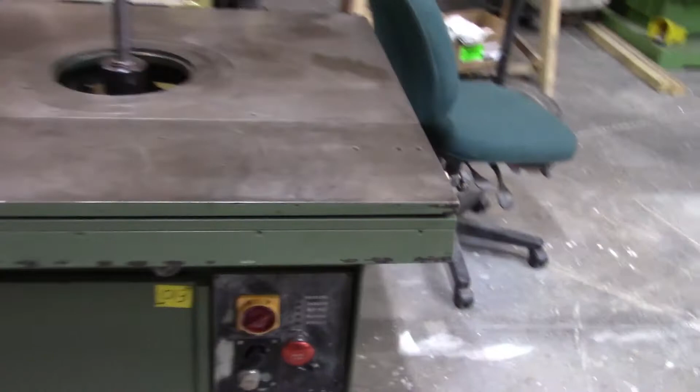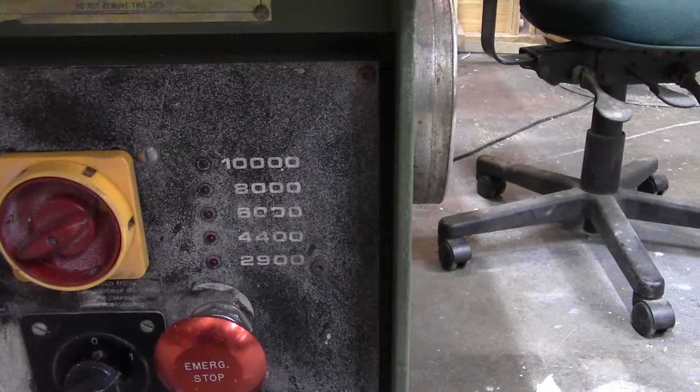It's an F-115. You can see down here the speeds you can acquire on it. You've got the low speed 2900, goes to 4400, 6,000, 8,000, and then 10,000 RPM. So it gives us a little bit more versatility.

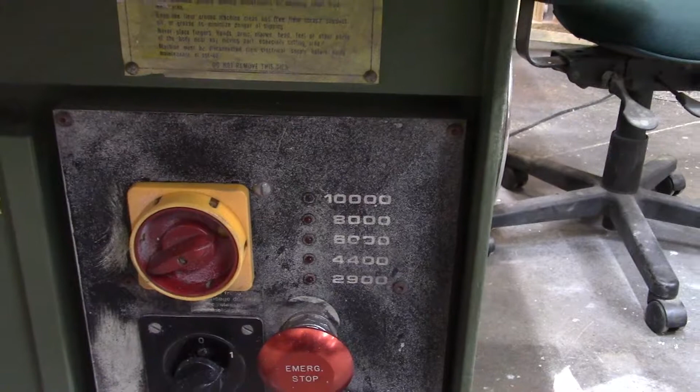The old Whitney was just a single speed, flat belt driven, so anyway this will be a little bit more advantageous to us. It also has this table here.

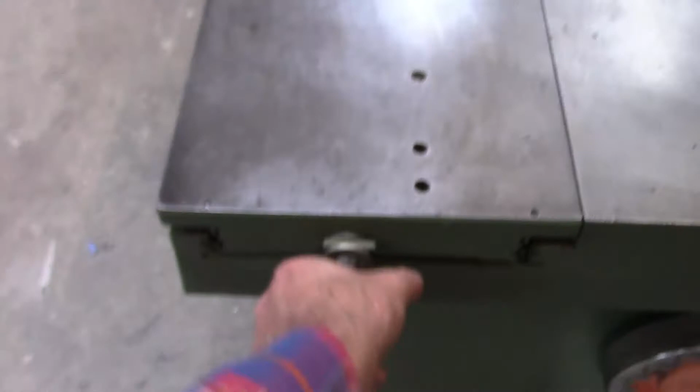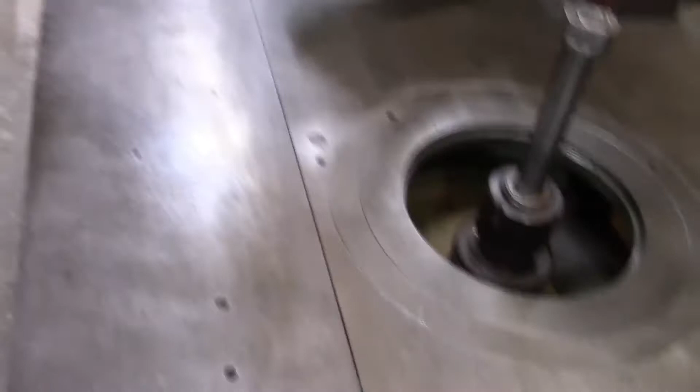This is a sliding table, so that gives us a little bit more when we're cutting the rails on the doors. We can put a T-fence on this and push them right through that shaper blade. It used to be that we'd have to do those end cuts by hand, and that's got to be a little bit dangerous, so this will ease up that problem.

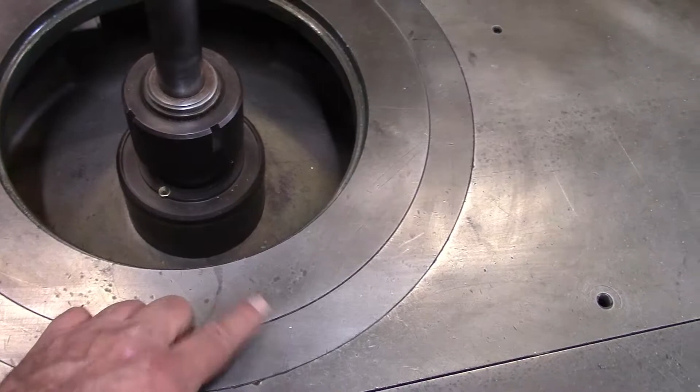So here's the rings. Each one of these is a size ring for a different set of cutters on this unit. The ring I showed you earlier comes in about so far, but it's still about a 7-inch hole, and we need to bring that hole into about 4.25. So we're going to make another one of these flanges with those details so it sets in there, and it'll be a little bit safer.

Now this is our other purchase we made. We got this for $100. It's a pin router. They're kind of being phased out of the industry because now everything's CNC.

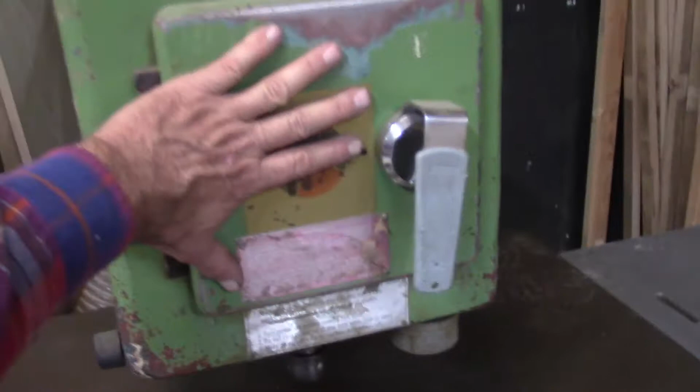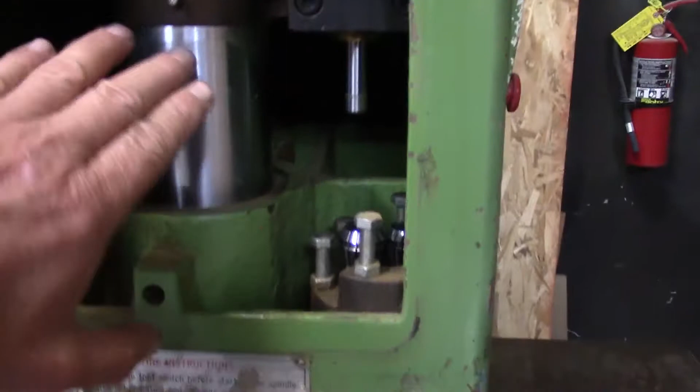But the way this works is your router is this upper head here. You can tell from my hand that that's a big drive there. It has a big old spindle in there that runs it. That spindle rises and lowers to take your bit down into the material.

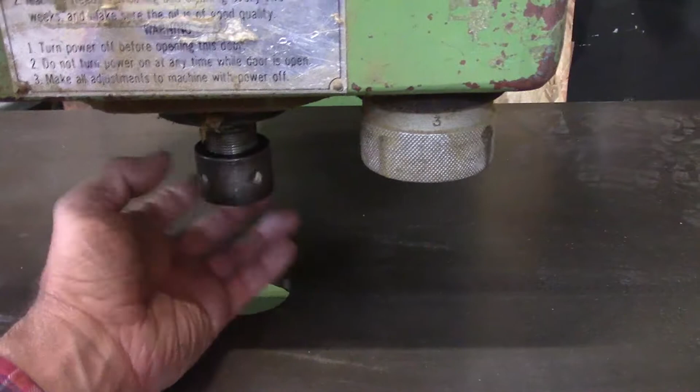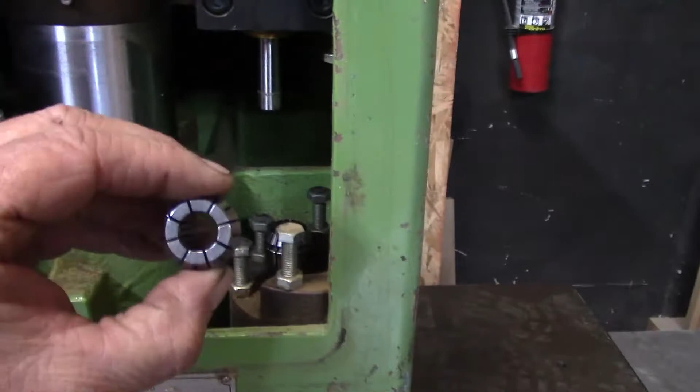This is where your bit goes up into. You can put whatever collet size you have for whatever bit size, typically either 1/4 inch or 1/2 inch. So we've got a 1/4 inch collet and a 1/2 inch collet. So that's all we really need for this machine.

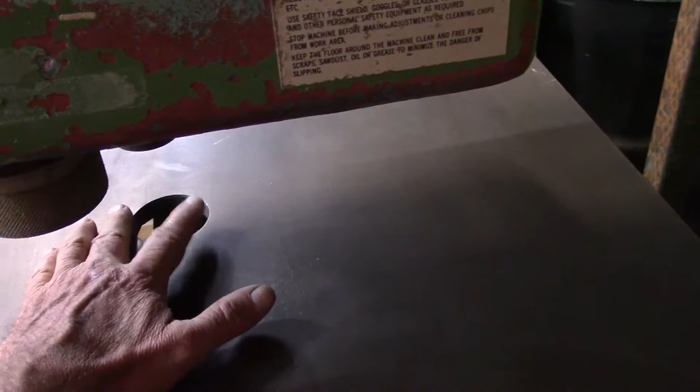So this pin, by stepping on a pedal, raises this pin. This bed lowers or raises depending upon the thickness of your material, and the spindle comes down and up, so you can measure the cut that you're going to make in its depth. And this pin comes up because... CNC is on a computer unit.

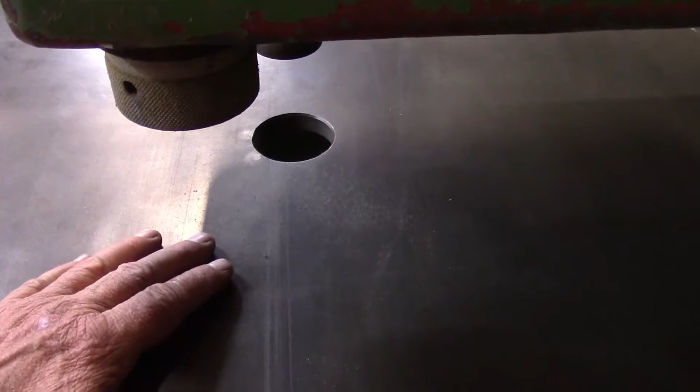Well, in the old days, which weren't too long ago, you'd use a pin router and you'd make a jig, and the jig would be so thick and it'd have the cutout that you wanted to make with your pin router. So you'd set your material onto that jig, the pin would come up, and wherever that cut was on your jig, that router bit would cut that material at that location. So you could do a cutout, you could make smiley faces, you could make just about anything you wanted with the right jig.

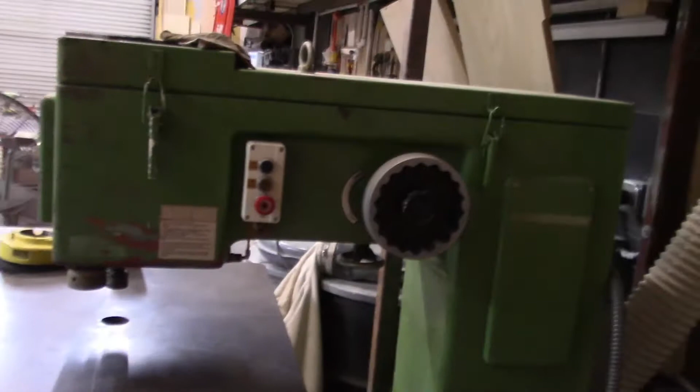These are used quite extensively in the making of musical instruments like guitars and items like that. They found them very useful. They make patterns, and they're able to use that pattern to make the shape of their guitars.

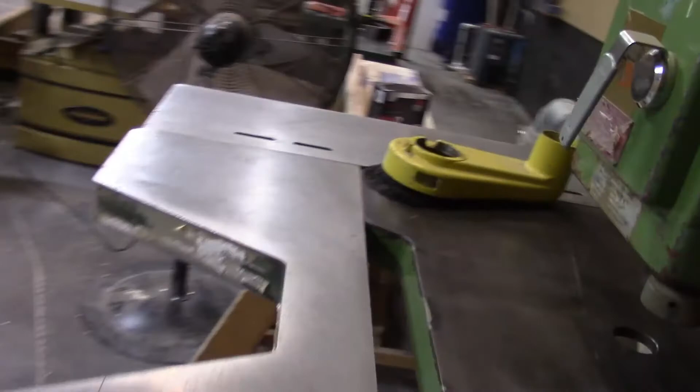So what I really liked about this is the big bed. We got this really nice big bed here. Now, to buy a machine that would cut out light kits in a door would cost me $15,000 to $30,000. Like I said, I got this for $100 plus some other fees. I think I'm totally into it right now at about $250.

So this has this nice big table on it, and I can set up an adjustable jig so that we could do all our light and louver cutouts in our doors, and that'll save us some time. Right now we lay them out by hand and cut them with a router from the top, and with a jig that we make for each occasion. So this will help alleviate that. So those are the two new tools we got.

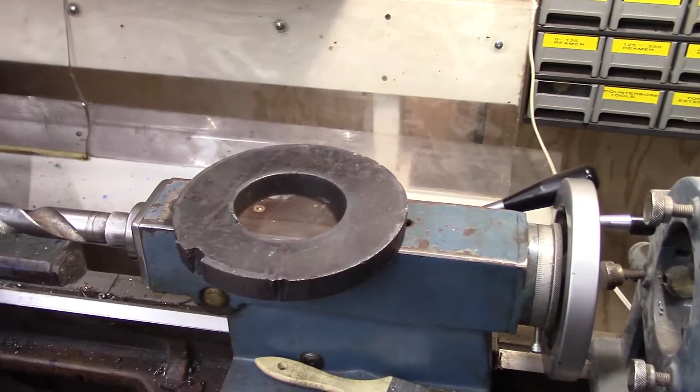Okay, we're over at the lathe now, and I wanted to give you a perspective. This is what we cut the part out of that we needed. We put this on the bandsaw and made a cut.

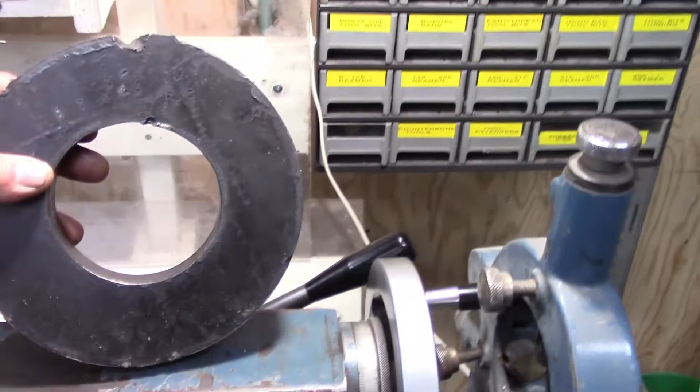I got this piece of scrap material down at our steel supplier. It was in their boneyard, and it had a lot of scale, and it had been cut with a torch. You could see that on the end. So it was in some places very hard, had a lot of scale on it, so we had to do a slow cut with this.

And this is what it turned into. You can see a real nice, beautiful, shiny cut. There's still a little bit of scarring here, but that'll be cut out when we do our recess. So we've already got started with that. A very pretty finish on it. It is looking nice. I did that last night.

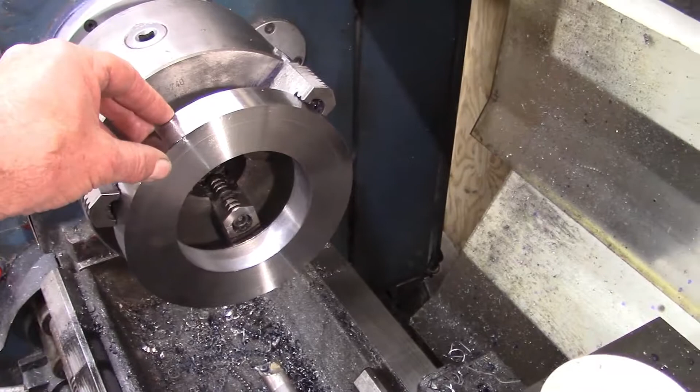I still have 1/8 of an inch to go on this hole to get it sized, and then we have to do the other elements on that part.

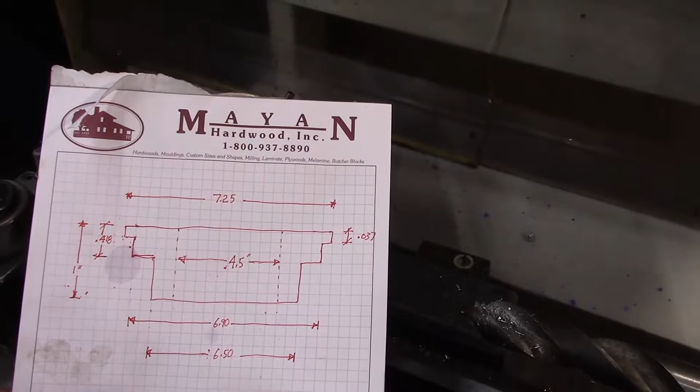So this is the drawing that I made for myself. It's an exaggerated drawing, but it helps me to see the details. So the top detail for the thin part of the flange is 7 1/4. We didn't get that. We're going to be down to just under 7 inches. So we'll probably pick up on the second flange level. Let's take you over there and I'll show you what I mean.

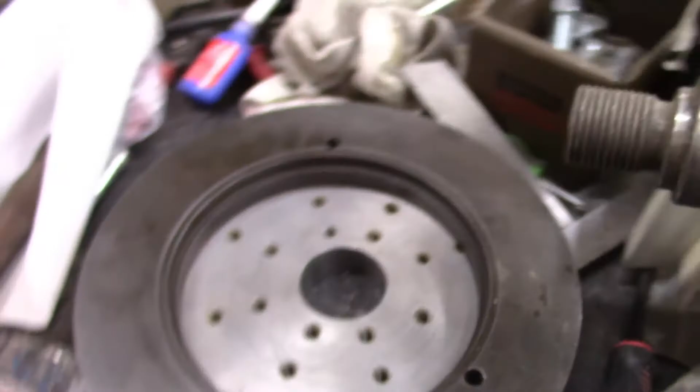This is the part that it's going to fit into, and you see that little groove there. That's 7 1/4 from side to side, and that's only minimal in its depth. I have it written down somewhere, but what we're shooting for is just to set into this inset here. We're not going to try to, because our part is too small to fit in there - had to trim too much off of it. So we're going to fit it down on this ledge and on down, and it'll be flush with the top of this. So that's what we're kind of doing.

So now I'll take you back over to the drawing and we'll discuss that for a second. So the width of this was 7 1/4, and of course all I've got is about 6 and a little bit over 7/8. So the first cut would have been 0.037. That would have been the first little ledge that we're making. But we're going to actually just go right down to this ledge. So we have to have that - that's going to be 0.418 to that depth, and the overall width of it is going to be 6.90. So we barely have enough material for that.

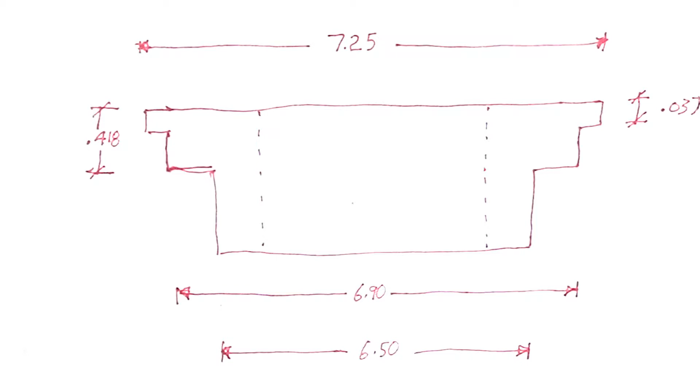So this is the bottom part. It has to be 6.50 to slip through there, and I have this drawn at 4.5. I went back and remeasured my knives, and they're just barely 4 inches, so we're going to go 4.25 for clearance instead of 4.5.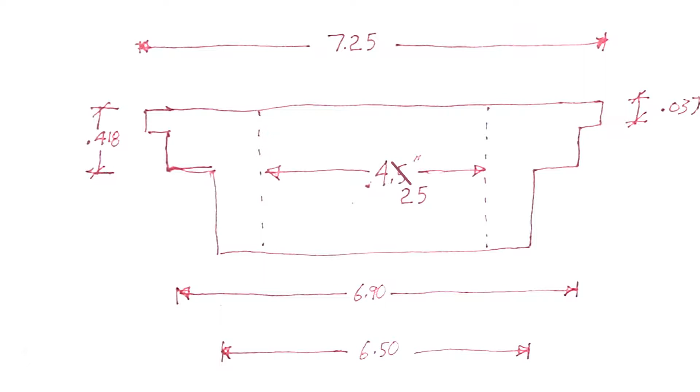It's always nicer to get your material more solid towards the shaper head. That way you don't have a place where the wood will dip down into it when you're doing end cuts and that sort of thing. So that'll work a lot better for the purpose that we're going to use that shaper for.

So anyway, that's what we're doing. We've got the part in here. We'll set up the camera and start going to work. Okay, so we've got about 1/8 of an inch to take off this, so we're going to turn her on and start doing our cutting.

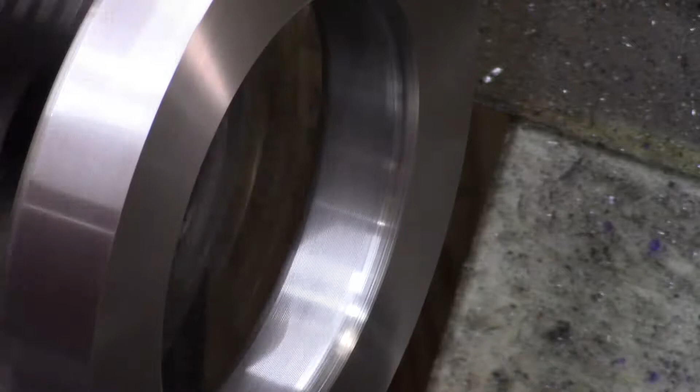Okay, let's get this side down. We got a nice radius in here, so that way we won't have anybody cutting their hands loading or unloading this plate, and because we will use the wider plates as well.

So now what we're going to do is we're going to blue this up, and we're going to measure out the thickness that we need to take off of this. So we'll get that done, and this is our next part.

I wanted to show you where I keep my little acid brush here. I got a little Pepsi can, cut it off, and I put a magnet in the bottom of the can, and then I put my brush in here, and it's held to that magnet, and I have some acetone down there so it keeps it supple. Because once that ink dries up, it stiffens those brushes. This way I can keep it clean and usable at all times.

Okay, so I used my caliper, came in here, and marked it. So we have our mark we want to cut to. Okay, so I've set up and just took a pass off of this to set my stop on my machine.

I'm going to power feed it through there. So I've got it set up so it'll take it right up to my cut. And so we'll go ahead and start taking this down to the dimension that we need.

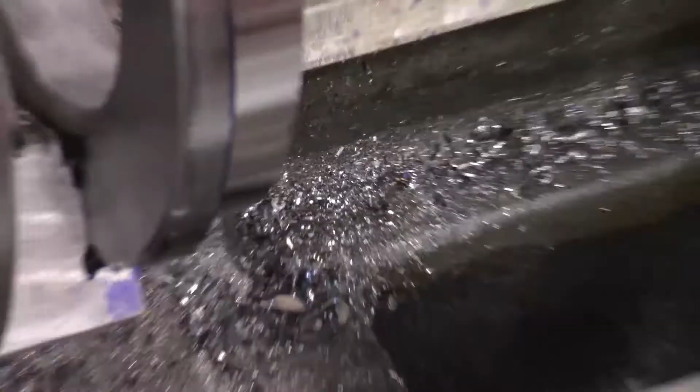There we go. We're right there, aren't we? Very nice. Okay, we'll pop this. Well, you know what I'm going to do is I'm going to clean up this corner here. That needs to be more. My tool had a radius to it, so.

As I was saying, my tool has a radius on the inside, so I'm going to clean that up in the corner there.

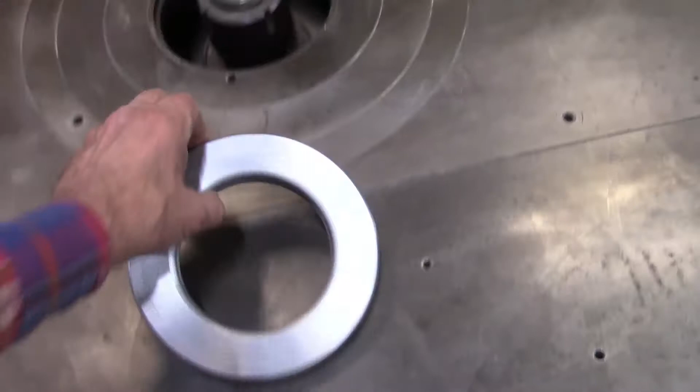Okay, so we've finished our ring now. So now it's the time to find out if it works. And you can see that the finish on this is just really nice. Of course, it's got some sawdust and stuff on it now, but it turned out just beautiful. Finished out really well. And let's see how she fits.

And just as sweet as can be. Now, I wasn't able to get it to fit all the way up to this ridge because the material wasn't wide enough, so we'll just have to live with that little gap there in between the two. But it fits very nicely, nice and snugly, and that'll prevent the wood from dropping down into that hole when we're cutting it with our shaper. So now we have our final ring on there, and this part is complete.